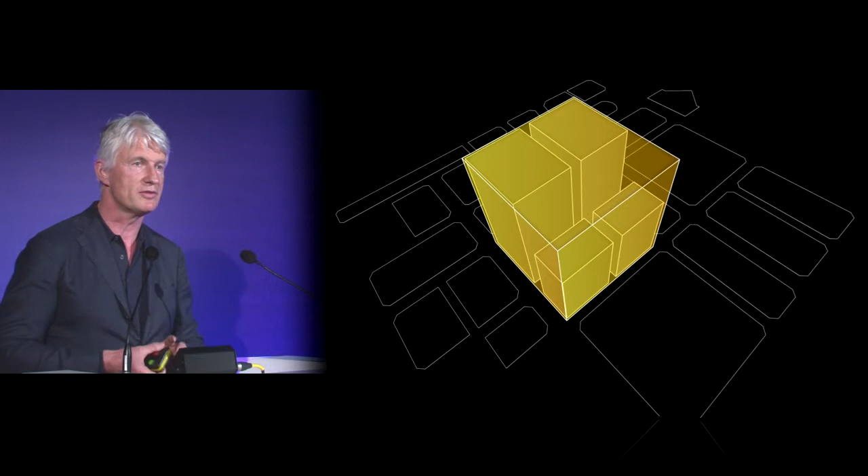What we have here is the idea of an oasis in the middle of the four skyscrapers. We cut out that hole, we put an oasis-like garden into it, and we made sure that the whole precinct, the whole building is orientated towards that kind of garden. And then we tried to measure the amount of biomass or plant mass that would have been on that site if it were a jungle, because the natural environment in Singapore would be a jungle.

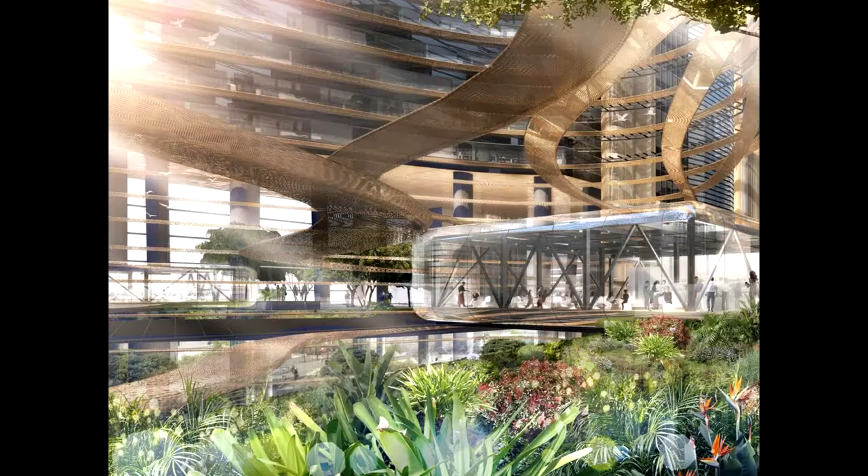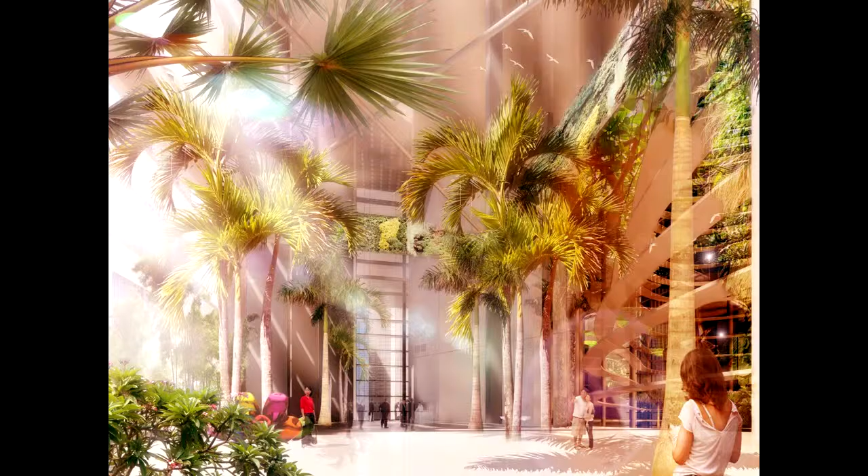And we tried to cover that, give that back to the people by putting gardens on every level of the building: ground floor, even basement, then every level of the podium, then another level of the transfer floors, and then on top of the building on the roof garden. And as well, we let the plants climb on the facade and on the louvers to make sure that the microclimatic balance is better, that the rainwater is kept back better than it would be without the plants, that we're producing more oxygen than would normally be the case. And many other issues like social issues, because people like that kind of plant.

In a climate like Singapore, that might be a good idea. In a climate like London, you could just walk to the other side of the street and have no problem. There it can be heavy rain, the monsoon, there could be a temperature which is not really comfortable, so we try to keep the people inside the building or inside the district and then connect them with subterranean subway or pedestrian walkways, covered walkways, underground walkways with the other buildings around and with the other parts of the city around.

I won't get too much into detail because the time is running, but one thing we try to do here is to show the client: is there a way to zero energy in a building like that? And what do you have to do to get there? And if you look carefully to the very end, there's a remaining percentage that you have to cover with green electricity that you can't produce on site, but that percentage is quite low. So you can get down with your energy consumption significantly, and your whole rating in the green rating system quite high, by doing all these good things: compact building, tight facade, very advanced energy production, wind turbines, many things. You have to do all that to get there.

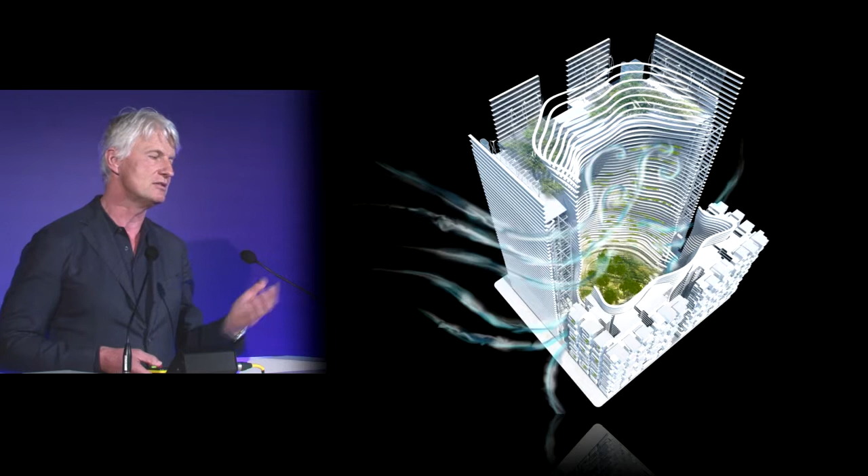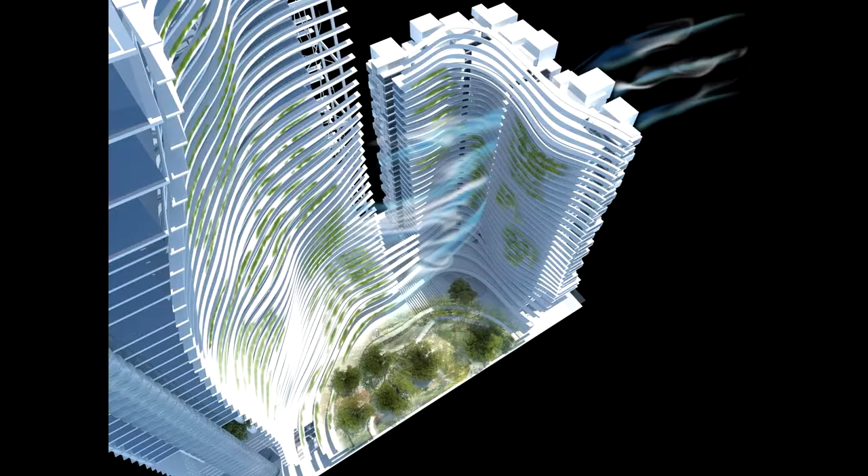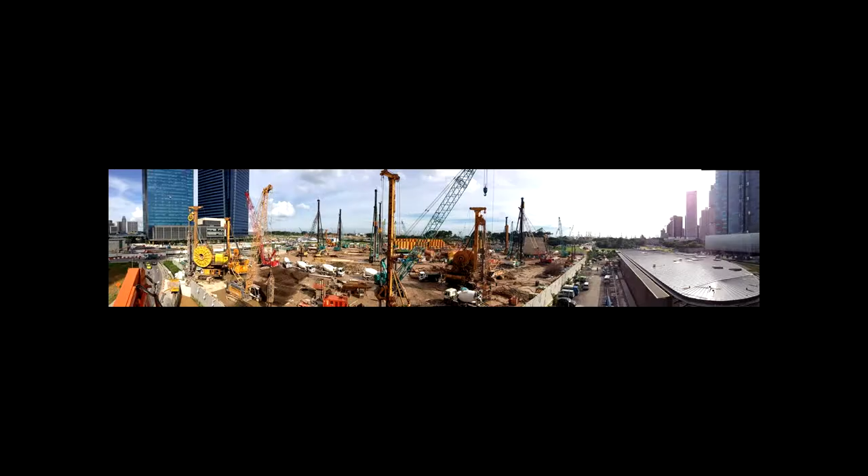But one thing which is especially interesting, I think, is because Singapore is so humid, you're always looking for a breeze, and what we did is we designed the building in the wind tunnel to make sure that you get that kind of breeze, that you get at least a nighttime purge, that you have some wind turbulences that you provoke by the design of the building, by openings to the outside, even openings in the building itself, to make sure that the residential units have access to quite fresh air all around. And that is how it will look in 2016. We have just begun work on site.

A building I would like to show you in a little more detail is Bligh Street, and the reason why I do that is, I think, if you look to London and the heritage aspects, Height and Heritage is the title of the conference, I have to say, if not here in London or mid-Europe, where else should we develop the most advanced, sophisticated, more civilized kind of skyscrapers, where the value of the land is so high, where the social and economic ability is so evolved.

And we did a building in Bligh, this is a street in Sydney, which is representing maybe our idea about a civilized kind of high-rise types. First of all, it is in the middle of the business district. It is in the middle of one of the most dense places in the world. Sydney overall is not a very dense place, but the East Sydney, the business district, is extremely dense.

And although it has a very privileged situation because it's all orientated towards the harbor, we had to be very careful to provide really the right views, the right orientation, sun orientation, and so on. And that's a story I would like to tell you. First of all, it is not the tallest building. It is a kind of small brother between all these big buildings.

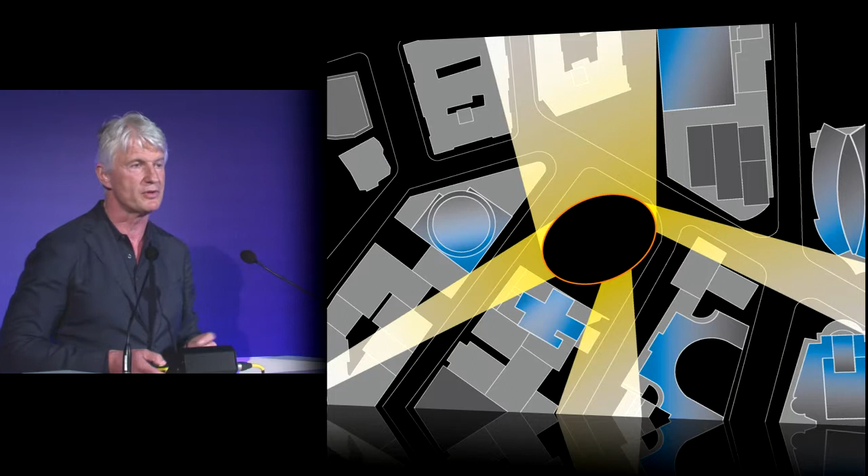There are quite tall buildings all around, as you have seen before, so we had to make sure that the views are kept free. And if you look from the harbor to the building, you see it's a free view to the building as well as from the building to the harbor. And then there are other views towards the city and towards Bondi Beach and Potts Point, and to make sure that you have those views between the taller buildings, it was needed that we orientate the building and position the cores very, very carefully.

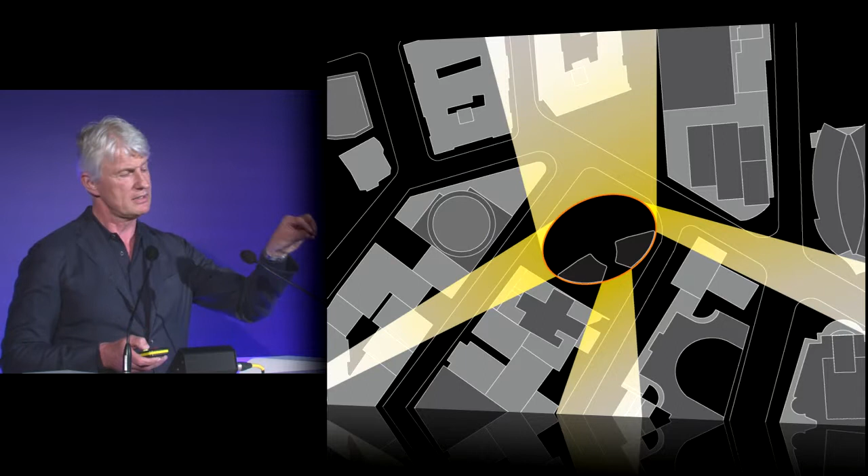Those are the views back to the city, O'Connell Street, and then to the heritage buildings, and then the position of the cores, like the cores block out the view to the nearest neighbors, but they are leaving the better views free. And then we tried hard to find the right facade and the right orientation for the building to make sure that most of the people have that view.

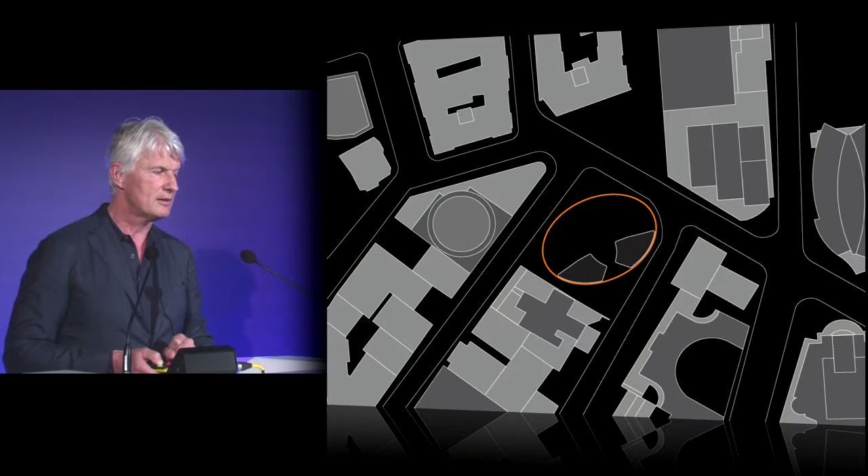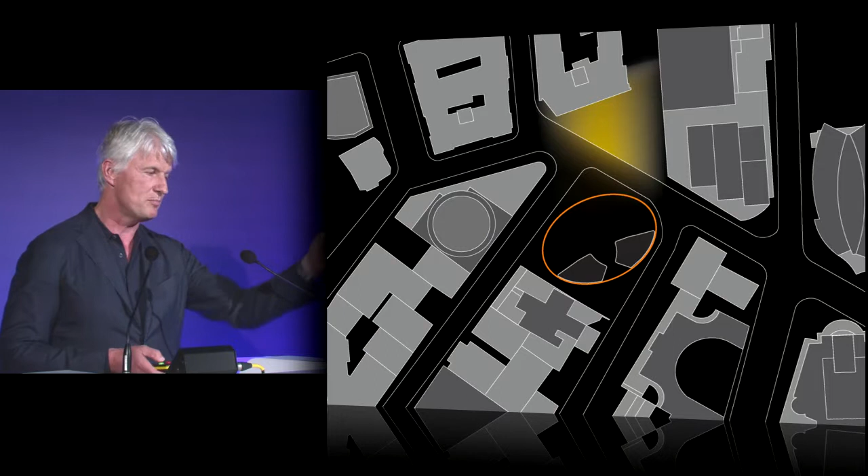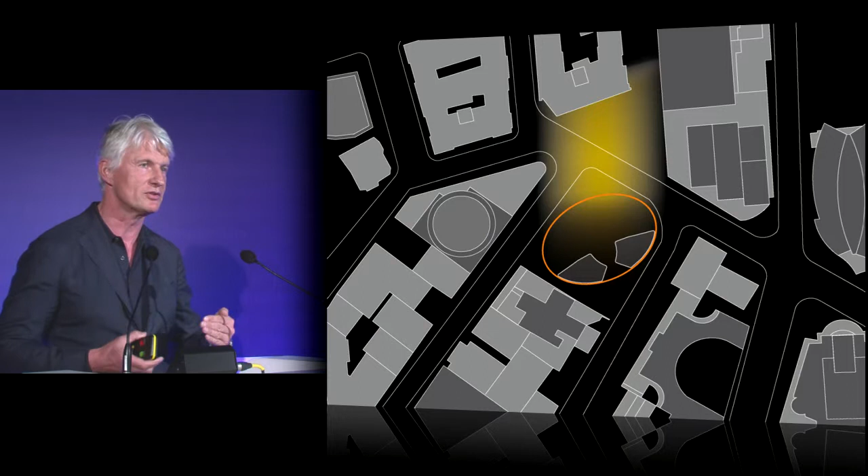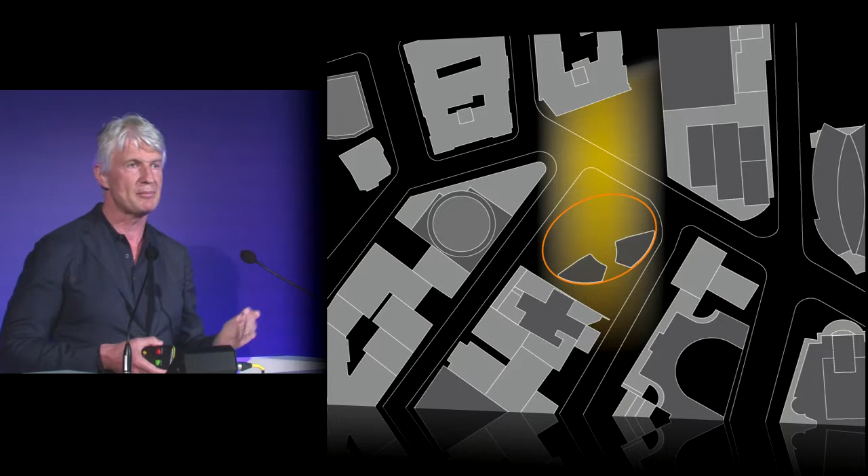What we did is a double skin facade all around, and we paid attention to the fact that Farrer Place was a triangular place overshadowed nearly the whole year by the bigger buildings around. And by turning the elliptical building to that kind of position, we made sure that Farrer Place was extended to nearly double the size. And then we raised the building by 20 meters. You will see that in a minute. Make sure that it is an ongoing public ground floor all the way up to Bligh Street. Then plantings and some public use in the ground floor made sure that this is an attractive point.

If you look carefully at that, I don't have a pointer, I think, but you will see on the left side the originally triangular shape of Farrer Place, and you see that we step back with the building to make sure that it is bigger, and then we have that stair in front of the building, to make it even more public and more open.

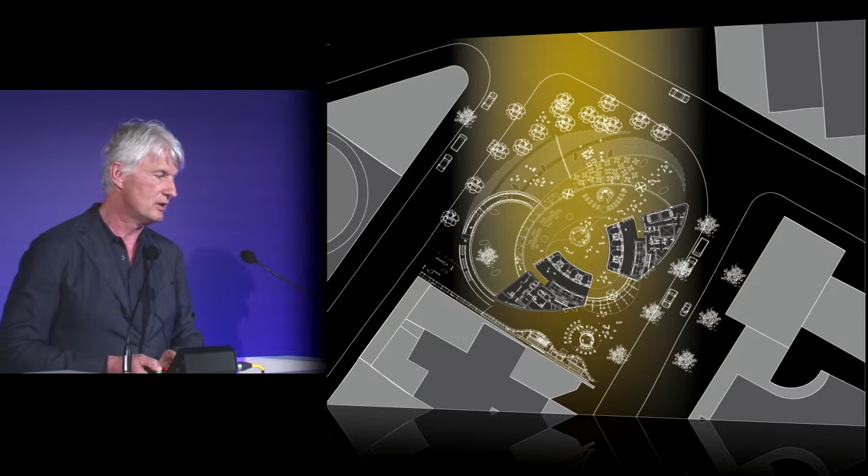And if you look at that, there's a view back to the heritage building on the other side of the street, and this is the section how it could have been, and that would be then the view. And we raised the building by 20 meters. More people enjoy the view, and at the same time we have a completely open public ground floor.

To make sure that that is properly addressed: the people in the building are a very prestigious lawyers' company, then the Prime Minister of Australia has his official offices here, and Bloomberg is in the building. So the level of security they are looking for might be exactly the same that you're looking for in the City of London, but the accessibility of the building is a completely different one.

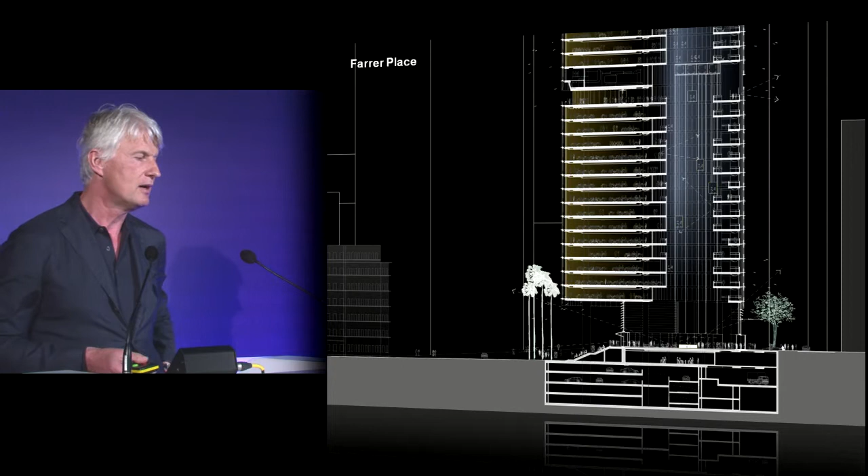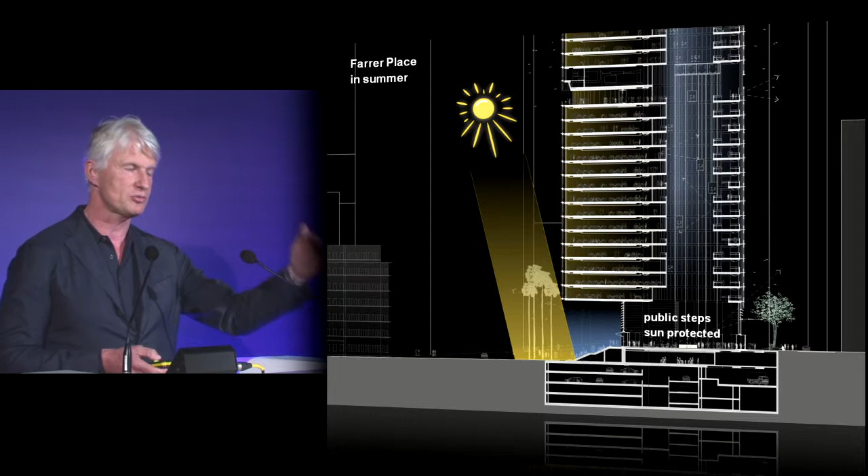It's not that highly secured, artistic kind of skyscraper, where the people have to stay outside the building, but they are invited to enter the building and use it as a public space. And the first step into it is that stair in front of the building, where people enjoy sitting there, enjoying themselves, having a good time. And the trick is, it's not just open, at the same time it is providing in summer some shading on the stairs, which you like because it's quite hot in Sydney.

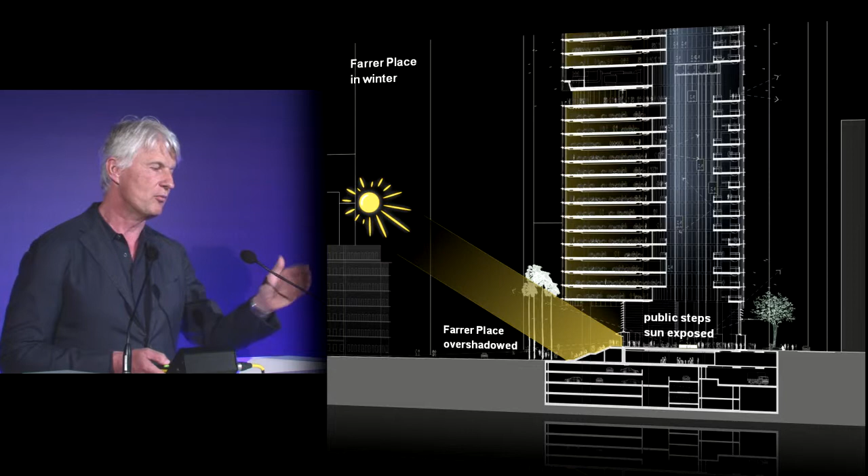And then in the winter, the flatter sun is coming into the building and warms up the place, so it's a very comfortable place as well on an Australian winter day. So the people like that pretty much, and they use it. And as you know, you can't force people to use a place like that. It has to be successful. And I think it's one of the biggest compliments that you can get as an architect if people accept your building being part of their daily life.

And then there is a restaurant and a cafeteria. You can open the building completely all around. The facade is like a garage door, 50 meters of operable windows on the ground floor. We have a childcare, a public one. Even the car entrance is part of the front and not the back of the building. We have a kind of shortcut around the building with that green wall, and on the other side we have that cafe point, sadly closed on that photograph, but normally open for the public.

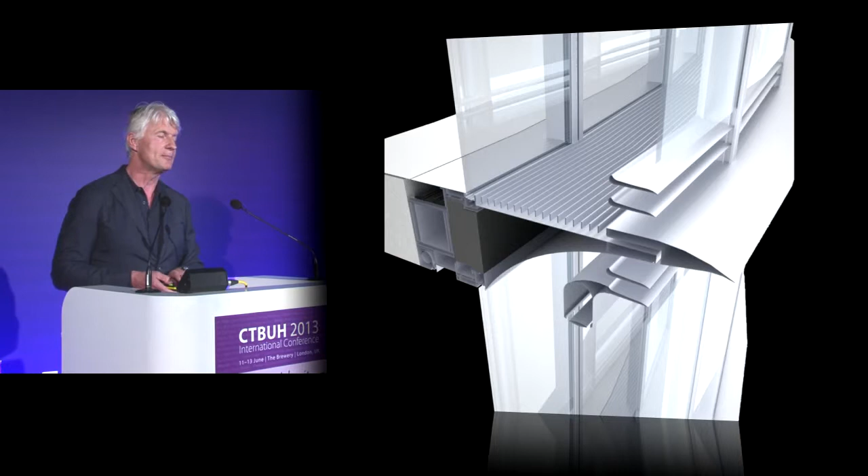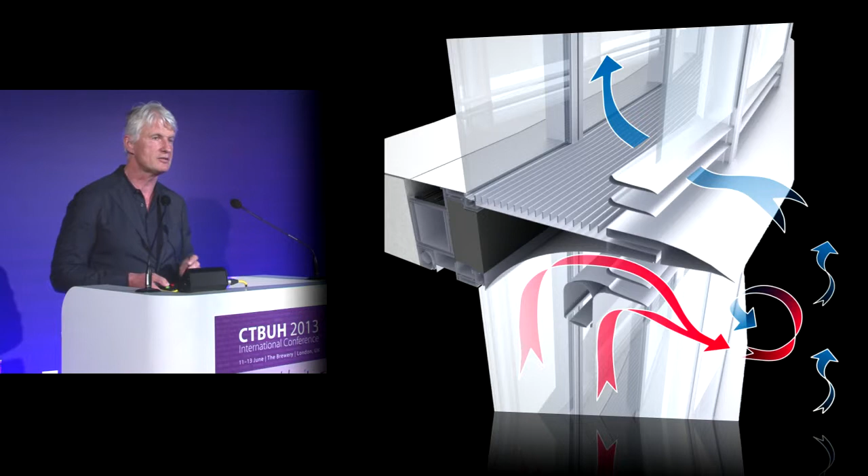And the building got a Green Star rating, 6 stars in Australia, the highest points ever awarded in Australia so far. It has a double skin facade on the regular floors. The double skin works with a closed cavity, with sun shading in between these two layers, with used air outlets and inlets. It makes sure that the sun shading is extremely efficient because it is in place, in work, with any wind condition, with any weather condition, and we have certain facilities like tri-generation with a very high efficiency. We have a double skin facade, as I mentioned.

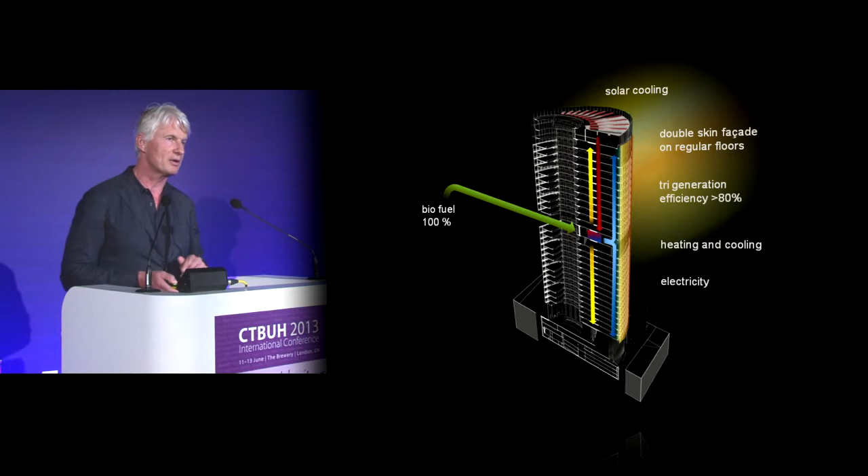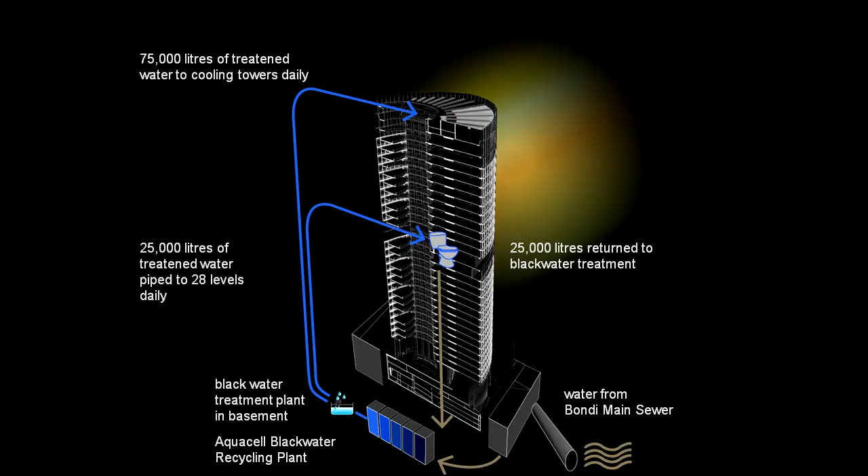We're producing electricity with that tri-generation plant, which is run by 100% biofuel. We could reduce the CO2 emission compared with a normal building by more than 40%. We save 100,000 liters of water every day by a quite curious trick. We get water back from the Bondi main sewer. We call that sewer mining. We clean it and we put it into the building for recooling and for toilet flush. So we are producing more fresh water than we get from the public net.

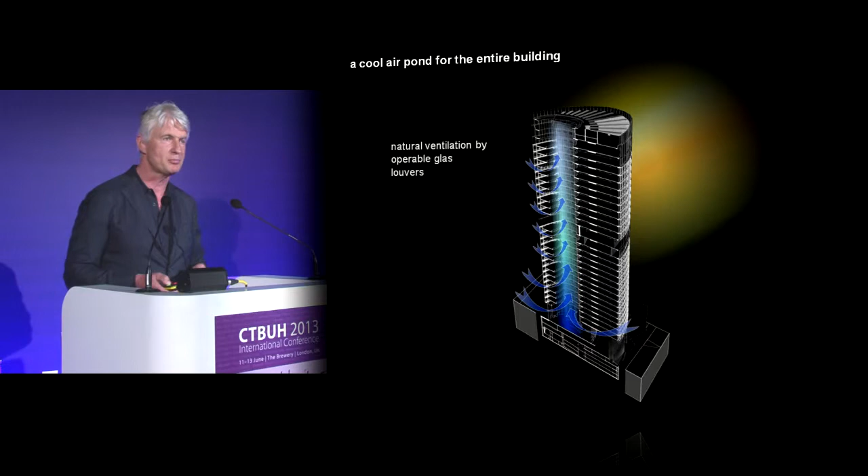We are providing 4% of the building's GFA as naturally ventilated by that atrium. And because it's naturally ventilated, it was an addition to the allowed GFA, so it was not counted against the allowance of GFA. We have that big atrium in the middle of the building, 145 meters, which is a resource of fresh air as well as night purge. And we use it as well for all the vertical elements like elevators and stairs and things.

And what is interesting about that is it's not just a communication hub and the main entrance of the building; reception and restaurants are there. At the same time, it's a matter of community, because a normal office high-rise doesn't encourage you to communicate. You meet the people in the elevator by accident or maybe in the lobby, but here you can see the people by moving through the building.

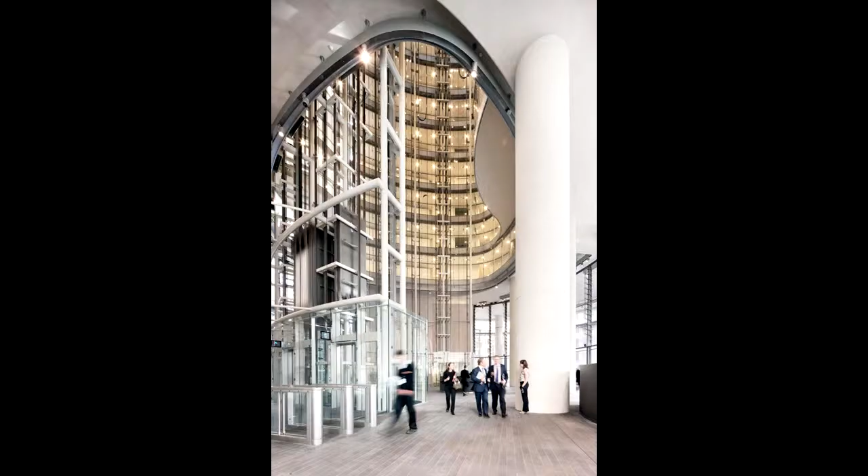There's one thing which I can encourage city governments to do. The city government of Sydney does not just force you to do an international competition. The second thing is, they give you 10% extra GFA for design excellence, which is a significant contribution to the economic success of a developer's building like that was. And then, well, a lot of awards.

And I have to say that was a very fresh experience in a quite far away country. A very, very good collaboration with the local architects, with the local government, with the client to make that possible. The decision to do that building, which is the building with the highest rent in Australia, was made 2 weeks after the bankruptcy of Lehman. So there were quite tough decision makers there. They were very, very sure about what they tried to do, and they made sure that everybody else followed their idea.